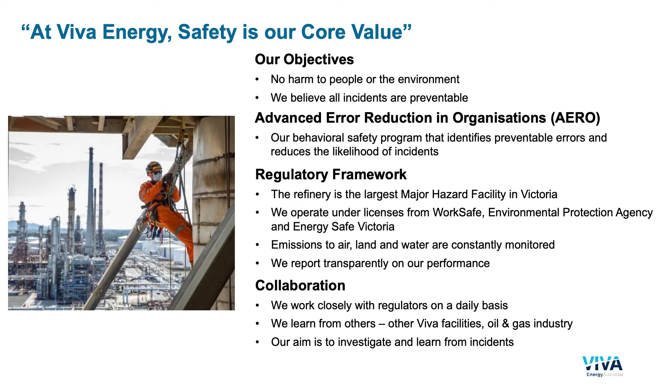The other thing as well is a fundamental belief that all incidents are preventable. And I purposely choose the word incidents and not accidents. Accidents are like acts of God. I walk out there and I get struck by lightning, right? But we do believe that by the way that we design and operate and maintain our facilities, we can design out incidents, and then through the way that we hire, train, and work with our people, we absolutely can prevent incidents.

So what I'd like to do now is turn it over to Rob. He's our project manager on the gas terminal, and he's got content that he'll take you through this evening as well. So look, I think what we'll do is just give a couple of minutes to go through the scope of the project. I know a few people here already know about it. There's some familiar faces, but there's some people here who I haven't met before. So I think it's worth just taking some time to talk about the scope.

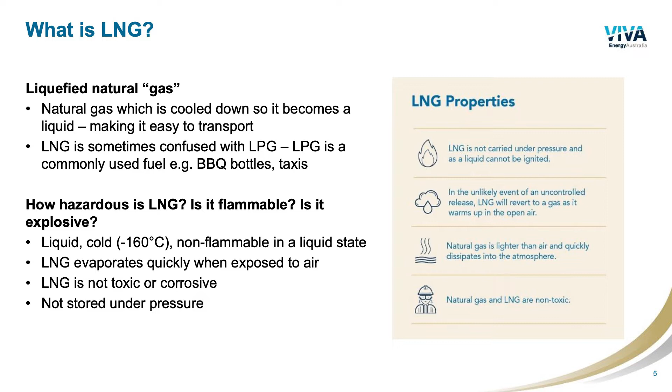So, what is LNG? It's essentially just natural gas that's cooled down. Gas is hard to transport in its vapour phase, but if you cool it down to about minus 160 degrees as a liquid, then you can transport it in large quantities, which is what this project's about. And then how hazardous is LNG? Well, when it's a liquid, it's not hazardous, and that's why it's cooled to that level. It's not toxic or corrosive, and it's not stored under pressure, so it'll come in on these vessels at minus 160 degrees and essentially ambient pressure.

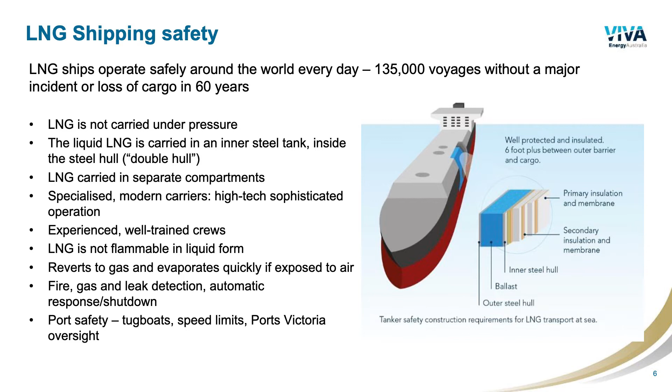Okay, so let's talk about LNG shipping. LNG shipping's been around for, I'd say, 60 years, quite a long time, over 100,000 journeys around the world. And I think a couple of key things that we need to bear in mind and understand is the design of these vessels. They're essentially a double hull. So they've got tanks within the hull of the vessel, and between the hull and the tank is really thick insulation. That's the only way you can carry this around at minus 160 degrees, is to insulate it.

And then the ships are really modern, the ships that we're looking at bringing in, and we're out talking to companies about this. They're all built less than 10 years ago, and they come with modern safety equipment. So there's fire and gas detection, there's shutdown systems, there's firefighting equipment on board, and then there's the new high-tech navigational aids and the rest that they come with. So they're a very modern vessel as well.

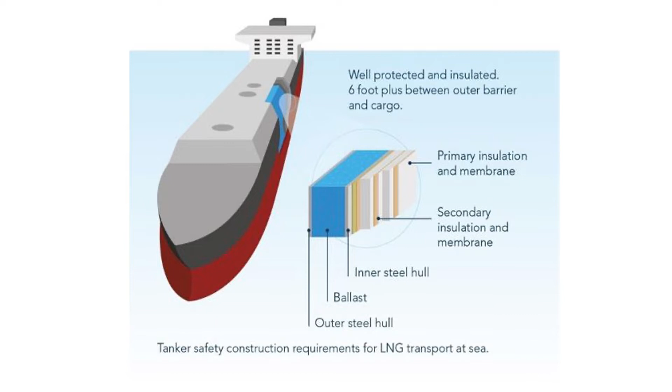And the other thing, when they come into Corio Bay, they'll be escorted by tugboats. The speed's really low. I think it's about 5 knots as they come into the bay. And we're working with Ports Victoria around all of this as well. Unloading takes around 24 to 36 hours. And we're looking at between 15 and 40 ships per year.

Yeah, so our plan is to send the seawater, which is cooled, from the gas terminal into our refinery, which will then warm it up and then discharge it under our existing EPA licence. So it would go back into the bay slightly warmer than the bay, but slightly less than what it's going into the bay at the moment.

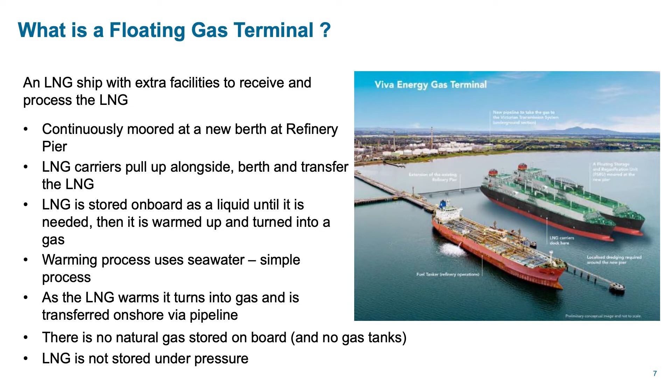This project, one of the pillars for it is that Victoria is a large user of natural gas, and our natural gas supplies are starting to drop off. And the forecast is that Victoria is going to be a large user of natural gas for a period of time. So we've talked about a lot of these already, the safety features.

It is highly regulated, as Dale touched upon. There's a refinery that's highly regulated. This floating gas terminal will be highly regulated by the same regulators. And really, at this stage of the project, we're undertaking some risk assessments, and detailed risk assessments are a key part of design development and project development. And I'll talk a little bit about the risk assessment process in a little bit.

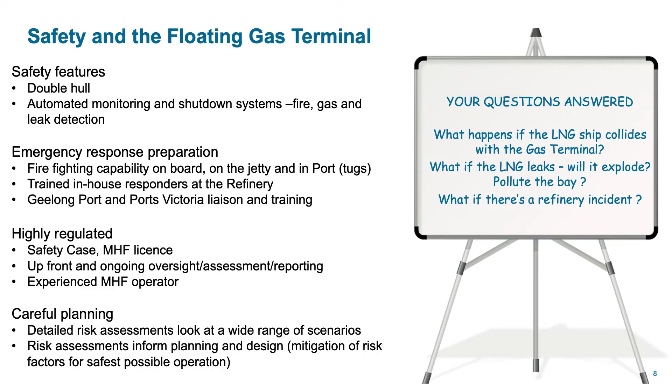All right, so risk assessment. And this is where it becomes scientific and mathematical. So it's not up to me or you or somebody else to do it, but there's a process that you undertake. And there's professionals out there who are risk and safety engineers, and they're the ones who we entrust to do this work. And it's accepted by industry, governments, regulators. It's used for planning purposes. And you use computer models that are built up over years with historical data to assess the risk.

And how is risk calculated? There's two parts to risk. There's the consequence of what happens, and then there's the likelihood. And you put those together and you get the risk. So the way I try to explain this sometimes is if you've got an airplane flying in the air and it landed on the Geelong West Town Hall, the consequence would be catastrophic. Right? Hundreds of lives would be lost. But the likelihood of that happening is so minute that none of us even worry about that, right? So that's the consequence and the likelihood coming together for a low risk. So we've got to talk about both things.

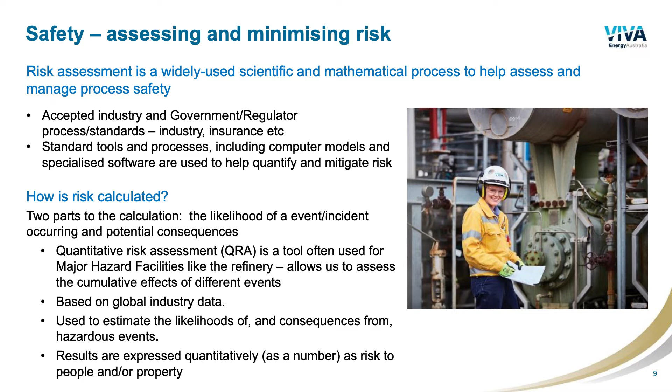And that's what a quantitative risk assessment is, or a QRA. It's a tool often used within major hazard facilities like ours, and it allows us to assess that risk. And what it does is it can present you with a number, essentially, or some contours of risk at various distances from the hazard, which in this case is an LNG carrier or the gas terminal.

And then a little bit more about risk assessments, and I think this is really important because what is the process? And really, you've got to identify the hazard, and we've talked about a few here tonight. Then you've got to understand the frequency, the likelihood and the consequence. Again, we've touched upon that. And then that gives you a risk calculation. And that's it over here. And then you need to ask yourself, well, is that tolerable or not? And then what is tolerable?

So, and then if it's not tolerable, well then you go back here and say, well, we've got to reduce the risk. And then that might be, certainly in our case, where we're at in the design phase of the project, well, what other design modifications can we make which will mean that we lower the risk and get it down to a tolerable point? So there's this loop here that you undertake and that we undertake.

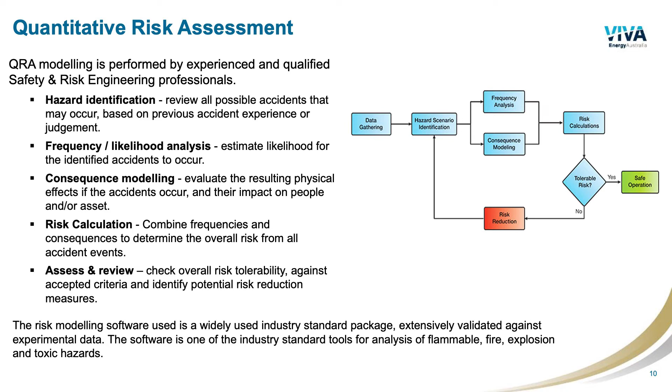So they're a really powerful tool so that you don't just go and design something and think that it'll be okay. You go through the rigorous process, get a technical scientific number as a basis, assess it, and then take any action that you require.

So we talked about the modelling and it giving you contours and giving you an answer and a basis. So this is the contour map for the operation at the gas terminal with an LNG-C in operation. And the question about what is a tolerable risk, these contours give you the risk, and the risk reduces the further you go away from the facility.

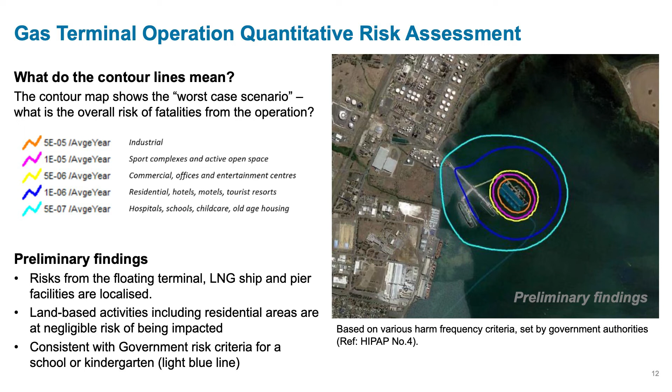So the orange line here, the most concentric, that's industrial. That's the benchmark for industrial. And then the light blue or aqua, depending on how your eyes are, is the contour for planning purposes, outside of which you would build a hospital or a school or a childcare centre. And you can see that here it's just impinging on the edge of our refinery, but the general public isn't impacted.

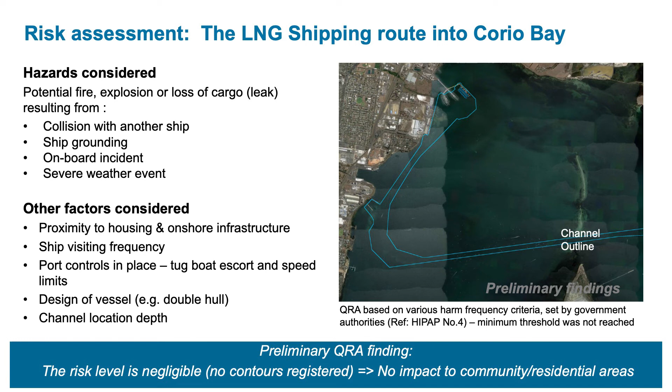We move on to the transport, and the preliminary QRA finding is that the risk level is negligible. There's no contours registered. So there's no impact to community or residential areas. And that's driven by the time where the transport is happening, so 20 to 40 times per year at a number of minutes as it goes up here, and the fact that it's low pressure LNG. Those two things are different to being at the location at the refinery, and therefore the risk is less.

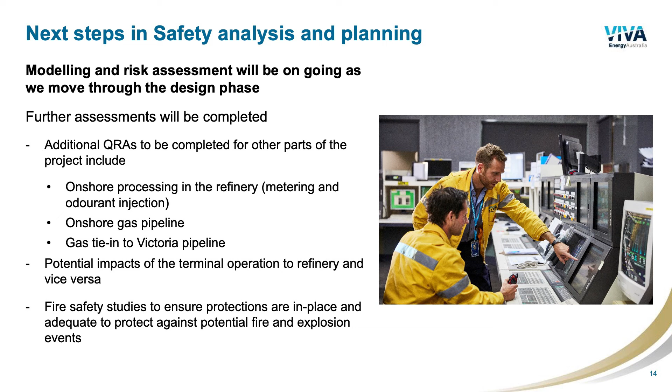Yeah, so this slide really talks about the next steps, and it talks about the additional QRAs to be done, including the interaction with our refinery and vice versa as well. So we're not at the beginning, but we've only done a little bit, and there's a lot more to come in terms of risk assessments and safety assessments for this project. And we're happy to share those results as we continue, whether that's in another couple of months or 3 months or 4 months or however long it is.

Security, Dale. I think we've talked about this. I did want to mention it, and I think we've covered security in a fair bit of detail so far. But we've done some work to understand whether our existing processes and controls that we've got in place are appropriate to include this project, and they are.

Okay, so tonight is one part of community engagement and receiving feedback. And as we go through the EES studies, there's other opportunities, and we've had the scoping document open for comment, and that's recently been finalised. And then there's also when the EES is submitted. But we'll continue to engage with the public. We have events like this every month. This month it's about safety. Next month, Joe, what are we talking about? Amenity. And the month after.

So we'll continue to have more of these formal engagements, but then we're also doing informal stuff. We're out at shopping centres and the like. And if you've got specific questions and queries, by all means, drop us an email. Go on our website. There's lots of information on there that's getting updated pretty regularly. And we're more than happy to answer any of your questions.